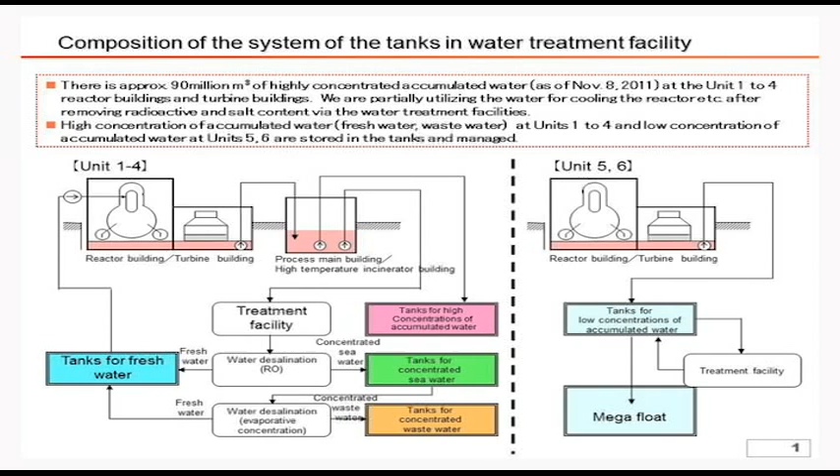Regarding accumulated water in the Unit 5 and 6 turbine buildings on the north side, there is leakage of underground water, etc. Therefore, tanks for the lowly concentrated accumulated water and megafloat on the sea surface have been installed. The amount of water in Units 1 to 4 in the south area is 90,000 cubic meters, and the accumulated water in the north area is stored in the megafloat, and so on.

As explained before, we prepare tanks for highly concentrated accumulated water, tanks for freshwater, and concentrated seawater. Tanks for highly concentrated accumulated water, shown in the left side, store concentrated waste with 10 to the 6th power becquerel per cubic centimeters. This tank is placed underground after the inside of the tank is treated. The capacity is 100 cubic meters per tank.

Regarding tanks for freshwater and concentrated seawater, the capacity of the round-shaped tanks in the picture is 1,000 cubic meters. On the other hand, the rectangular-shaped tank has an approximate 450 cubic meter capacity. These kinds of tanks are currently installed in the power station.

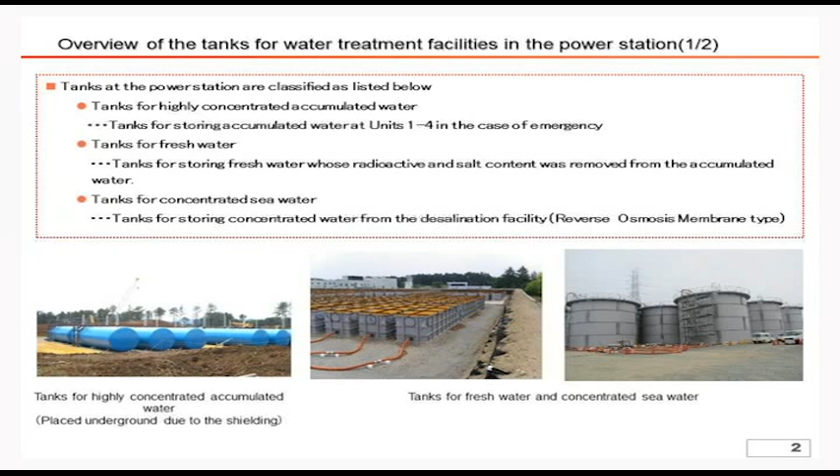Tanks for lowly accumulated water are installed in the north of Units 5 and 6. The megafloat shown in the right side picture is also for lowly accumulated water. The megafloat has a total capacity of 10,000 cubic meters, and 8,000 cubic meters is set as the operational level.

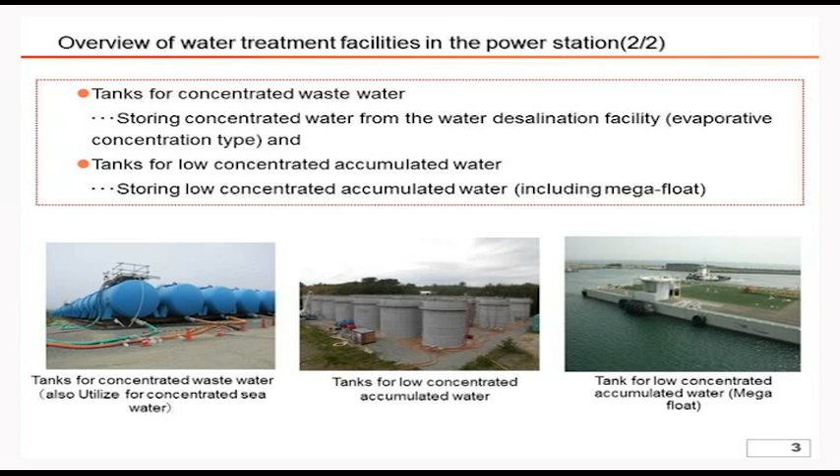I will explain the current layout of the tanks and the storage capacity. Regarding treatment facilities for low radioactive accumulated water in the north area, the megafloat stores 7,939 cubic meters, which accounts for 99% of its 8,000 cubic meter capacity.

The accumulated water of the Unit 5 and 6 turbine buildings shown on the right side is stored in the tanks for low radioactive accumulated water. The tank stores 8,048 cubic meters out of its 10,800 cubic meter capacity.

Tanks for concentrated wastewater store 3,534 cubic meters out of its capacity of 9,500 cubic meters. Tanks for freshwater store 7,132 cubic meters out of 17,700 cubic meters.

Moreover, tanks for concentrated seawater use 78,316 cubic meters out of 85,600 cubic meters. Tanks for highly concentrated accumulated water have a capacity of 2,800 cubic meters. However, these tanks store no water because water treatment is done in order.

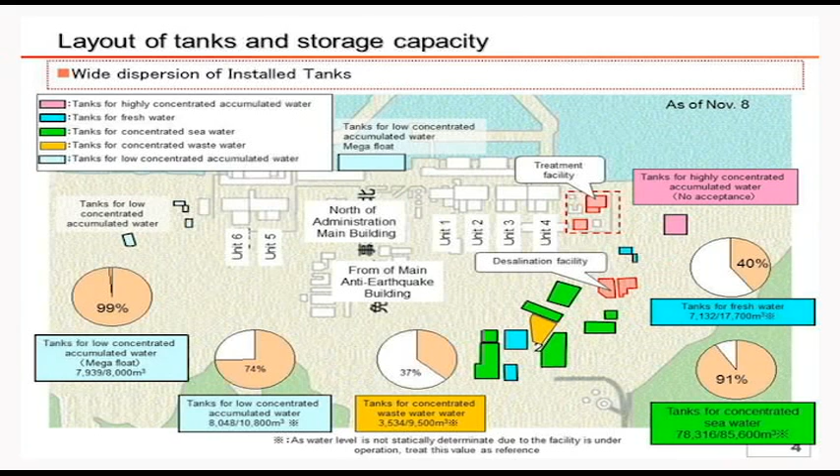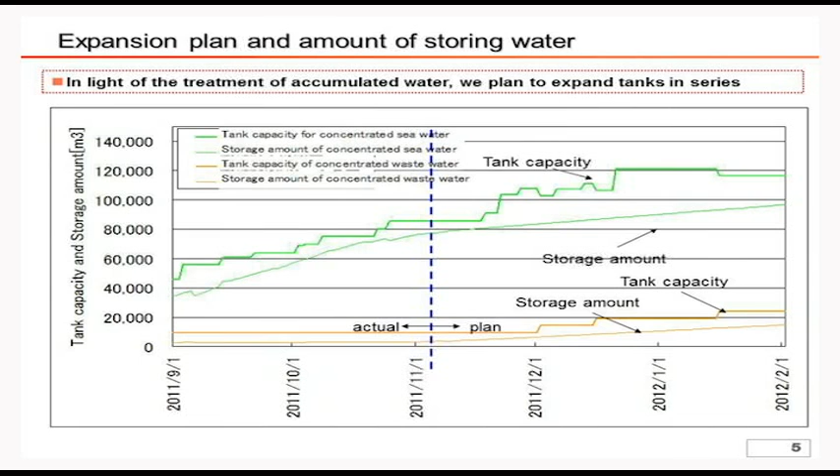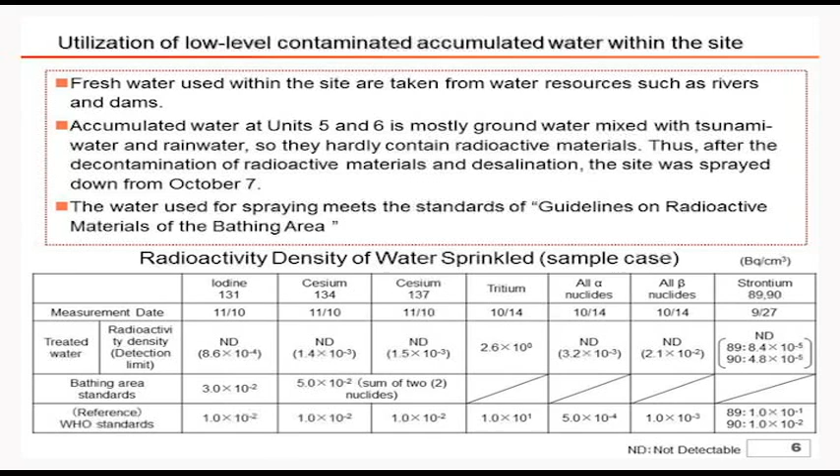For freshwater reuse, low-level contaminated accumulated water has been sprayed within the site. The radioactive density of the sprinkled water is shown on the table. These results meet bathing area standards. Especially the iodine and cesium levels are below the detection limits. Also, all alpha nuclides, all beta nuclides, and strontium 89 and 90 levels are below the detection limits. However, the tritium level is 2.6 times 10 to the 0 power per cubic centimeter.

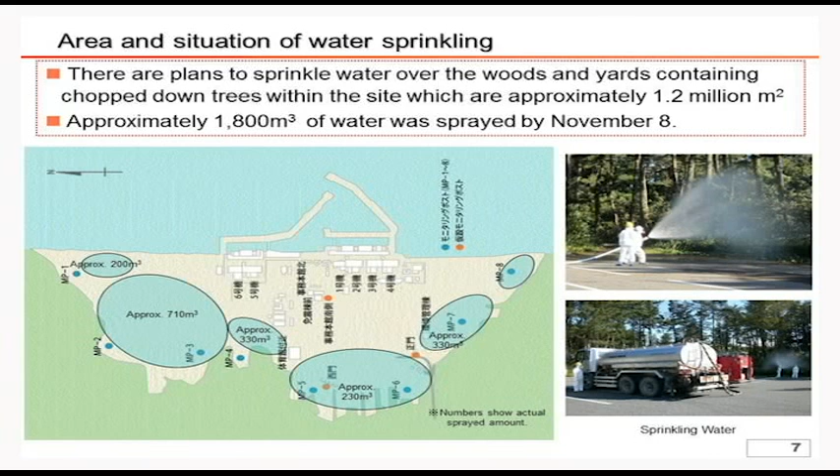Regarding the situation of the water sprinkling, please see page 7. There are plans to sprinkle water over the wood, cut-down tree yards, and the road within the site, covering approximately 1.2 million square meters. Approximately 1,800 cubic meters of water was sprayed by November 8th.

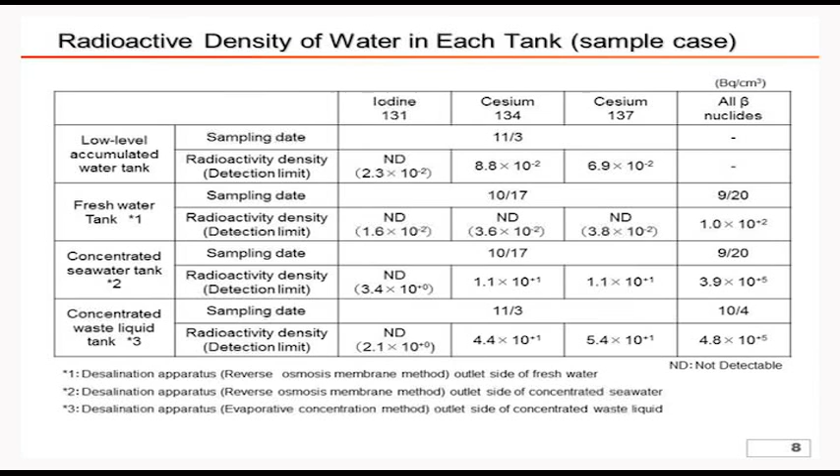This is the water amount at the tank and an analysis of the contained water.

In addition, there is another theme we would like to address: the reliability enhancement of the water treatment facilities. We did a test drive of the water treatment facilities late this June, and these facilities have been operated since. Its low operating rate continued for some time, but it is now operating stably. We achieved this status because we received counseling from the Nuclear and Industrial Safety Agency and developed preventive measures for these accidents.

We are continuously considering various improvements for operations and planning to analyze failure cases and measures to improve the reliability of the water treatment facilities.

These measures will focus on three points. First, avoid shutdowns of the water treatment facility due to equipment failure. Second, avoid long shutdowns due to failures by securing spares for components with high failure frequency that take a long time to obtain. Third, reduce the risk of leakage.

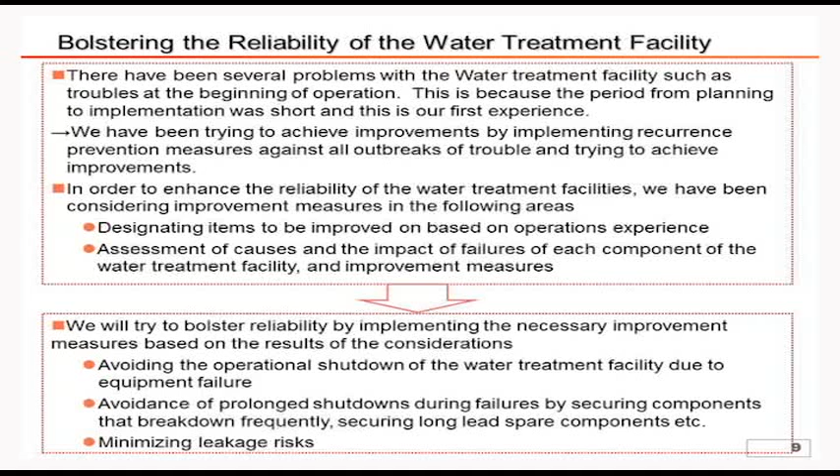A sample case of our considerations is shown on the final page. Some of the pumps installed in the skids of the cesium adsorption apparatus, KURION, have broken down. Then the water is transferred via the water treatment transferring pumps of the oil separators, as shown in the figure. Maintenance is difficult due to high radiation in the case of equipment failure, because these pumps are inside the skid. Therefore, we are planning to install additional pumps outside the skids for easier maintenance, shown by the dotted line between the SMZ skid and the H skid.

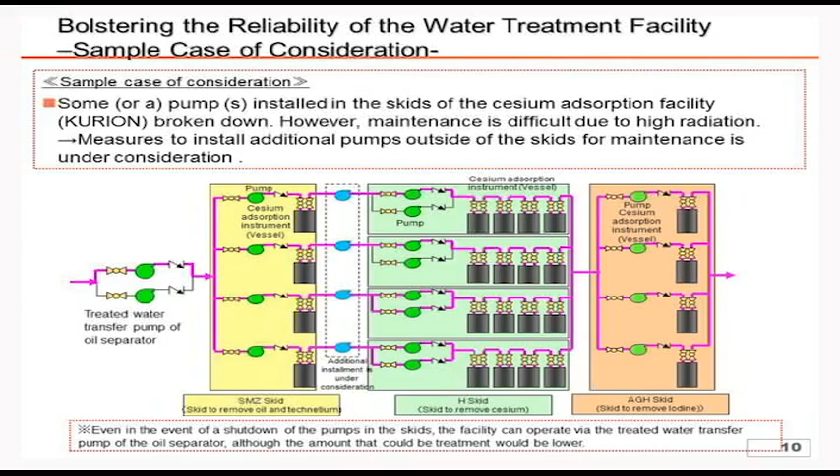We will consider other measures to improve the reliability of the water treatment facilities. We will continue to make efforts to maintain stable operations, reduce the development of radioactive accumulated water, and reduce the risk of radioactive leakage.